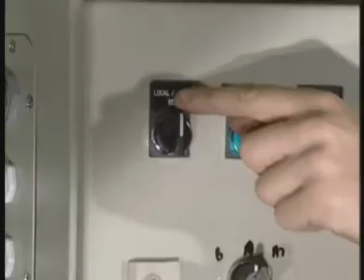Check that the pressure drop indicator for the pressure filter is green. Also check that the hands on the pressure drop gauges for both suction filters are in the green area. Check that the oil pressure is between 40 and 50 bar.

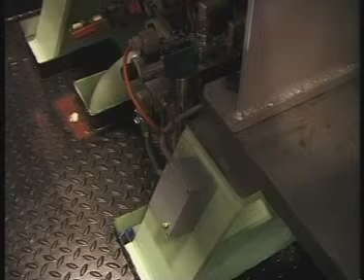Press the pre-lubrication button on the operating panel and check each of the feedback indicators to confirm that all lubricators are functioning properly. Set both pumps to remote control. The lubricating system is now ready for operation.

When the auxiliary blowers are started up, the lubricating system will automatically start and carry out the pre-lubrication process. If the engine is not started up within a certain period of time, the lubricating system will return to the standby mode and then start automatically when the engine is started.

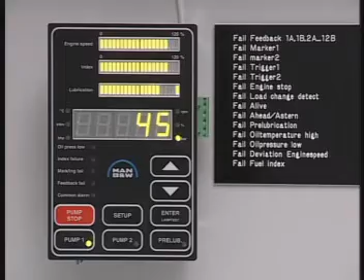Check that one of the pumps starts automatically when the engine starts and that no alarms have been activated. Check that the pressure builds up to 40 to 50 bar and check each of the feedback indicators to confirm that all lubricators are functioning properly.

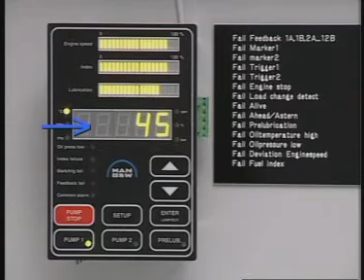Check that the oil temperature is between 40 and 60 degrees centigrade. Check that there are no leakages in the system. Check that the pressure is between 40 and 50 bar. Check each of the feedback indicators to confirm that all lubricators are functioning properly.

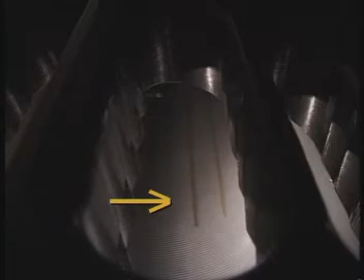Feel the lubricating pipe for pressure surges, the presence of which indicate that the lubricating points are being supplied with oil. Make regular checks, for instance in connection with the scavenge port inspections, that each lubricating point is functioning correctly. Start the lubricating system and press the pre-lubrication button to inject oil into the engine cylinders. Use a mirror inserted through the scavenge port to check all lubricating points.

Regularly measure the cylinder oil consumption via the cylinder oil tank and use these measurements to calculate the cylinder oil feed rate. Once a good cylinder condition has been obtained, with well-running cylinder liners and piston rings, the good condition can in most cases be sustained by employing the basic setting to ensure the correct cylinder oil feed rate. The basic setting corresponds to the reading 100% on the operating panel.

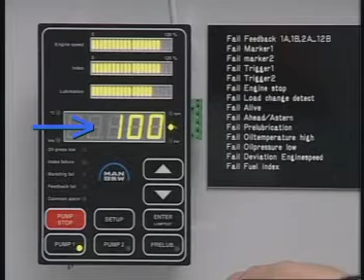When running in cylinder liners or piston rings, or in the event that abnormal cylinder conditions are detected during one of the regular scavenge port inspections, the feed rate of the relevant cylinders may have to be adjusted. See Instruction Book, Volume 1, Operation, Chapter 707. The feed rate of an individual cylinder can be adjusted via the operating panel.

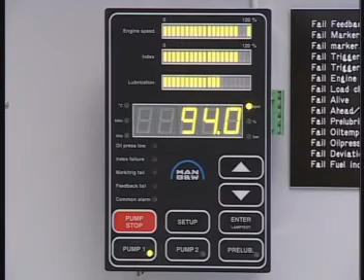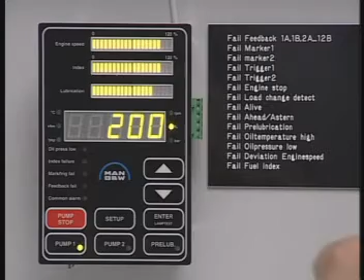Press Setup and Enter simultaneously to enter the setup mode. Press Setup to display the current feed rate setting. Press the up or down buttons to change the feed rate to the desired value. Press Enter to save the new value. Press Setup and then the up or down buttons to repeat this sequence for another cylinder, or press Enter to exit the setup mode.

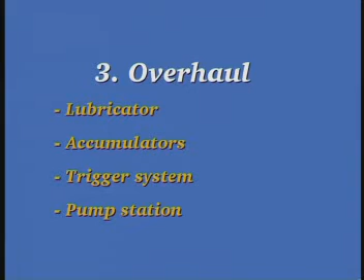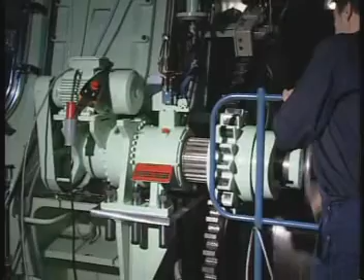Before starting any disassembling work, stop the engine. Shut off the starting air distributor. Block the main starting valve. Engage the turning gear. Open the indicator cocks and switch off the electrical power supply to the pump station.

Note, it is not necessary to stop the engine and pump station if the lubricator unit is fitted with 2 lubricators for each cylinder. See Instruction Book, Volume 2, Procedure 903. In the event that a lubricator malfunction activates the engine slowdown function, the lubricator can be replaced without stopping the engine, provided that lubrication is re-established within a maximum of 15 minutes.

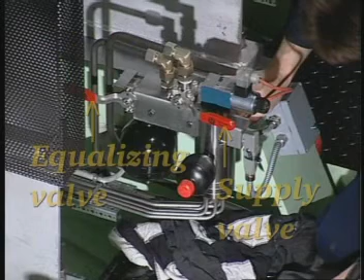Close the supply valve and then open the equalizing valve by turning both handles to a horizontal position. Loosen and remove the screws from the cover with lubricating pipes. Remove the screws that secure the lubricator to the hydraulic block. Disconnect the electrical plug and remove the lubricator.

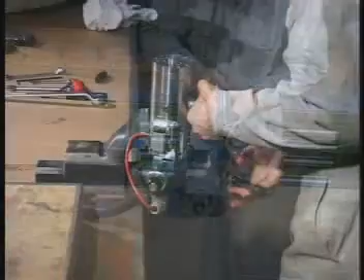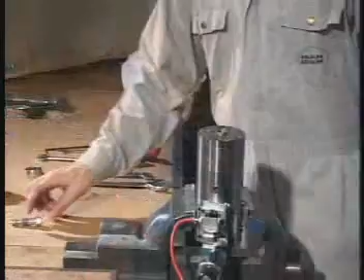Secure the lubricator in a bench vise with soft jaws. Unscrew the oil accumulator and the adjusting screw, and remove the bushing. Discard the O-ring from the adjusting screw.

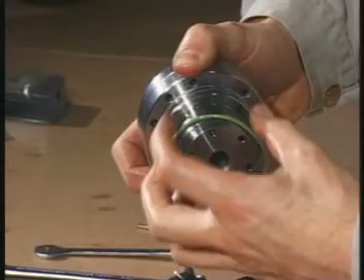Remove the screws that secure the cylinder block to the housing and remove the cylinder block. Discard the O-ring from the cylinder block. Remove the spring and the actuator piston and remove the plungers.

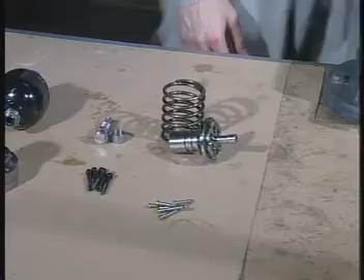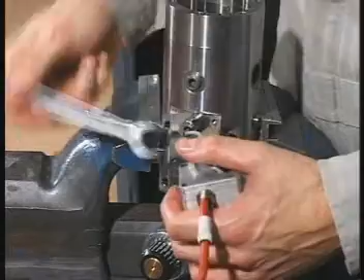Loosen and remove the connector on the solenoid valve and remove the terminal box. Carefully unscrew the feedback sensor. If the feedback sensor is to be replaced, disassemble the connector and disconnect the feedback sensor.

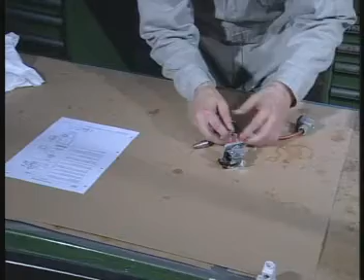Mount the new feedback sensor after fitting it with a new O-ring. Connect the wires as shown in the instruction book and then reassemble the connector.

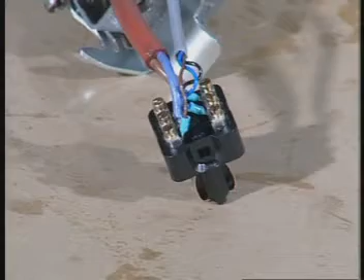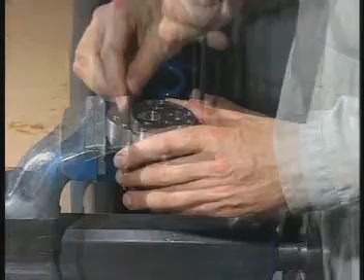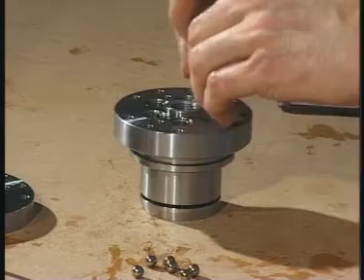Place the cylinder block in a bench vise with soft jaws and remove the non-return valve cover. Remove the springs and the steel balls. Remove and discard the O-rings. Carefully clean all the parts and dry them with clean, non-fluffy rags.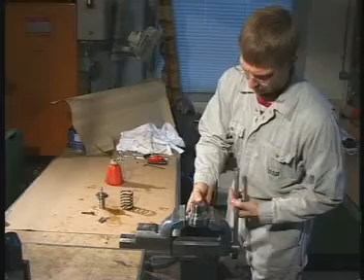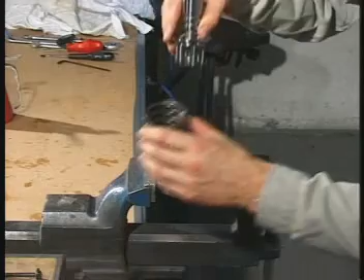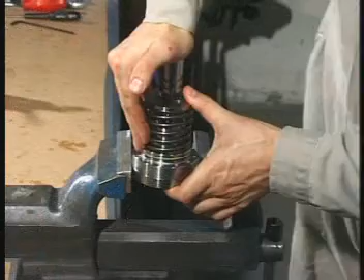Mount the plungers in the actuator piston and lubricate the plungers and cylinder block with cylinder oil. Insert and align the plungers in the cylinder block. Remove the actuator piston assembly, mount the spring and reinsert the assembly. Check that the plungers can move freely. Press the actuator piston downwards and insert the screw to keep the parts together.

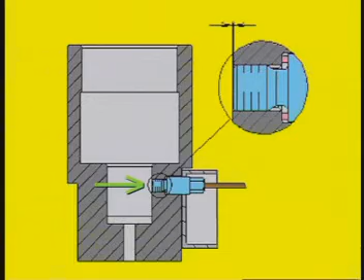Place the lubricator housing in a soft-jawed vise and mount the feedback sensor provided with a new O-ring. Check that the end of the sensor does not protrude into the cylinder for the actuator piston. Use fingers and something with a firm, straight edge, for example a caliper, to carry out this check. Mount the terminal box and the solenoid valve connector.

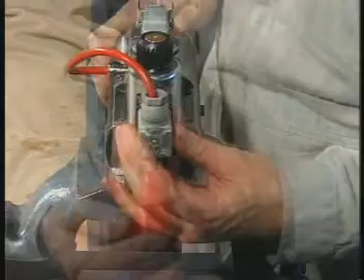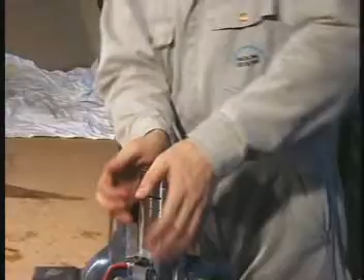Lubricate the housing and mount the cylinder block assembly. Remove the screw from the cylinder block assembly. Mount a new O-ring on the adjusting screw and mount the bushing and adjusting screw.

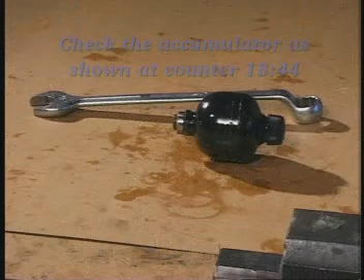Check the condition of the gasket before mounting the accumulator. Finally, mount the oil accumulator. If the lubricator is not to be installed immediately, use plastic plugs to protect each opening and coat all surfaces with a thin layer of oil.

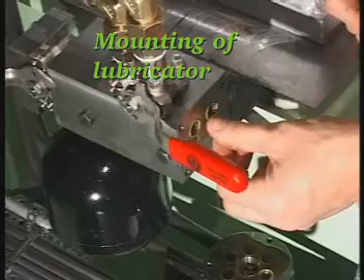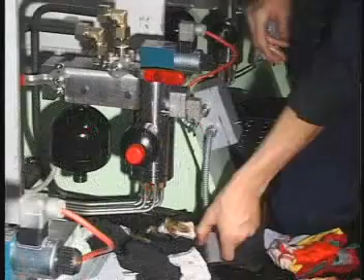Mount new O-rings on the hydraulic block and on the cover with lubricating pipes. Carefully mount the lubricator and secure it to the hydraulic block with the 4 screws. Connect the electrical plug and mount the screws which secure the cover with lubricating pipes to the lubricator.

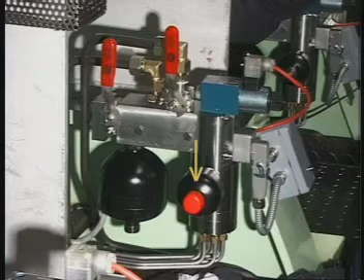Finally, close the equalizing valve and then open the supply valve by returning both handles to the vertical position. The smaller outlet accumulator must be dismounted before the pressure test is carried out. If there is room, the larger inlet accumulator can be tested while mounted.

Note: it is not necessary to stop the engine and pump station to check the inlet accumulator if the accumulator is equipped with a cut-off valve and a minimess drain connection. See Instruction Book Volume 2, Procedure 903. Close the supply valve and then open the equalizing valve by turning both handles to a horizontal position. Loosen the oil accumulators and unscrew them slowly to release any remaining oil pressure.

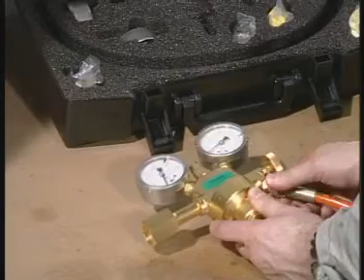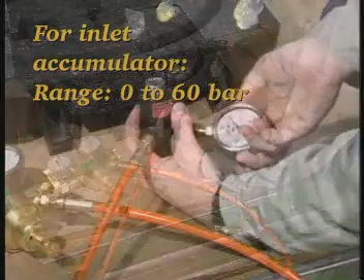Connect the hose to the reducing valve and to the filling valve. Insert a copper gasket and mount the 0 to 60 bar pressure gauge. Connect the reducing valve to the nitrogen cylinder and tighten all connections.

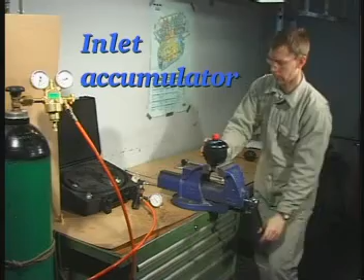Secure the inlet accumulator in a bench vise with soft jaws and remove the plastic plug. Carefully clean the sealing surfaces of the accumulator and the filling valve and mount the filling valve.

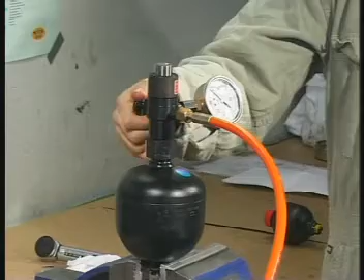Make sure that both the venting valve and the outlet valve are closed, and then open the plug screw in the accumulator with a 1/2-inch square socket wrench. Read the nitrogen pressure and compare it to the value stated in Procedure 903.

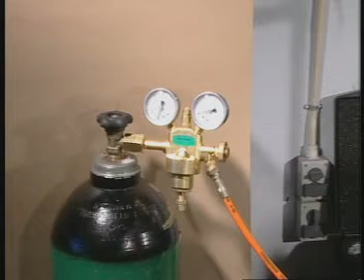If the pressure is too high, reduce the pressure by opening the venting valve. If the pressure is too low, make sure that the reducing valve spindle is turned fully counterclockwise and then open the valve on the nitrogen cylinder. Turn the spindle slowly in the clockwise direction until the outlet pressure is slightly above the specified pressure.

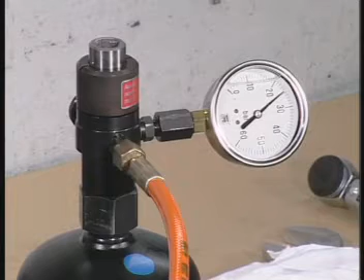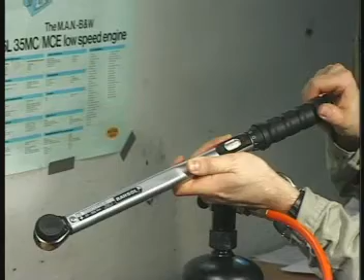Open the outlet valve, fill the accumulator to the specified pressure, and then close the outlet valve. Adjust the torque spanner to the value stated in Procedure 903 and tighten the plug screw.

Open the venting valve, close the valve on the nitrogen cylinder, then open the outlet valve and turn the spindle fully counterclockwise. Remove the filling valve and once again tighten the plug screw to the specified torque. Finally, mount the plastic plug.

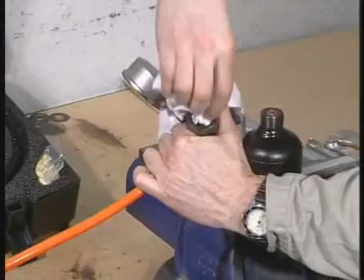Secure the outlet accumulator in a soft-jawed vise and remove the plastic plug. Carefully clean the sealing surfaces of the accumulator and the filling valve and mount the filling valve. Remove the 0 to 60 bar pressure gauge. Fit a copper gasket and mount the 0 to 10 bar pressure gauge.

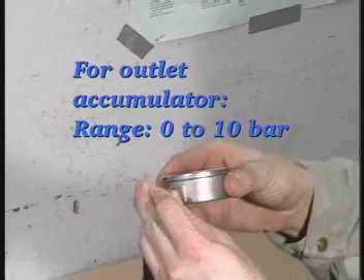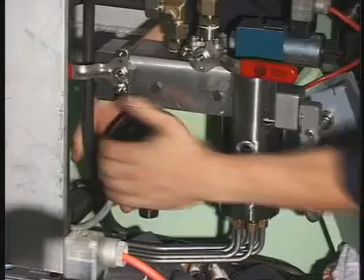Repeat the pressure testing procedure. Refer to Procedure 903 for the specified nitrogen pressure. Check the condition of the gaskets before mounting the accumulators. Mount the accumulators. Finally, close the equalizing valve and then open the supply valve by returning both handles to the vertical position.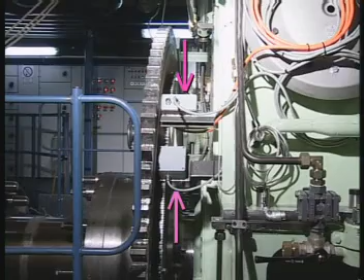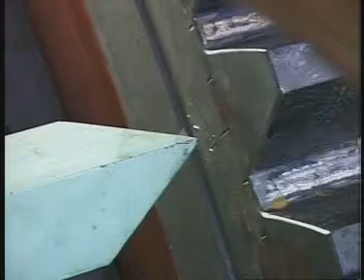The position of the crankshaft has no relevance with regard to the checking and replacing of the trigger pickups. However, before checking and replacing marker pickups, the crank throw for cylinder number 1 must be turned to the top dead center position. Check the top dead center position at the turning wheel and confirm it by means of a pin gauge measurement in the crankcase.

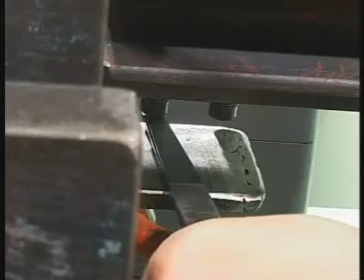Check that the uppermost edge of the marker plate is in the center line of the marker pickups. Check the distance between the pickups and their counterparts with a feeler gauge. See Instruction Book Volume 2, Procedure 905. Adjust if necessary. Remove the junction box cover.

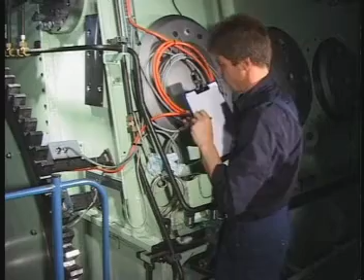Before replacing the pickups, make a sketch of the wiring connections, indicating which wire is connected to which positions, so that the safe remounting of the pickups can be ensured. Loosen the nuts, lock nuts and wires, and replace the pickups.

After installing the new pickups, check that the uppermost edge of the marker plate is in the center line of the pickups, and check that the gaps to their counterparts correspond to the values given in the instruction books. Finally, reinstall the junction box cover.

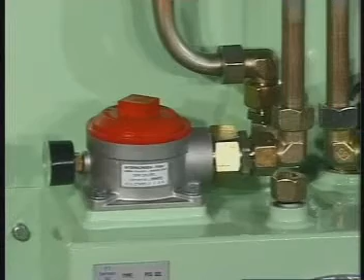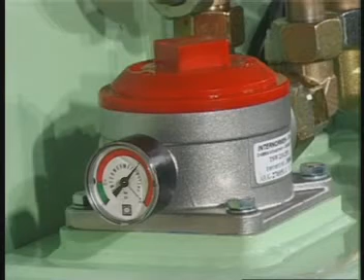If the hand of the pressure drop gauge points to the red area, the suction filter must be overhauled. This can be carried out while the pump station is running. Stop the pertaining supply pump and switch off the electrical power supply. Close the valve in the suction line and dismount the suction filter cover. The suction filter housing has a built-in cut-off valve which automatically stops the oil flow to the housing during disassembly.

Remove the filter insert and fit a new one. Mount the cover. Open the valve in the suction line. Finally, switch on the electrical power supply and set the pump to remote control. Check that there are no leakages.

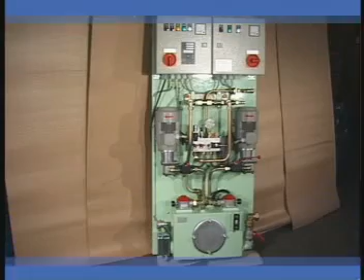If the pressure drop indicator is red, the pressure filter must be overhauled. This can be carried out while the pump station is running. Turn the handle of the valve so that the oil bypasses the filter. Dismount the filter housing and replace the filter insert with a new one.

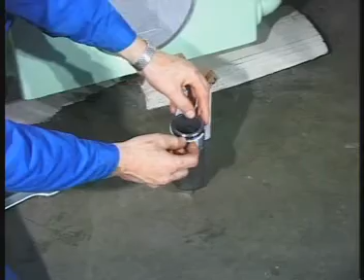Mount a new sealing ring on the filter housing and mount the housing. Reset the pressure drop indicator, if this has not already been done automatically, and turn the handle of the valve so that the oil passes through the filter. Check that there are no leakages.

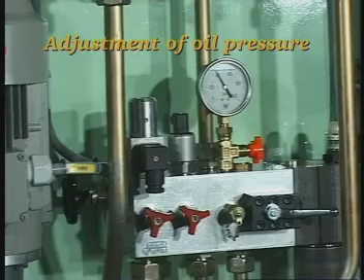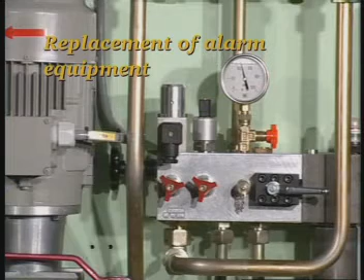Read the oil pressure on the pressure gauge and compare the reading with the value given in the instruction manual. If necessary, adjust the pressure by turning the handle on the side of the hydraulic block. The hydraulic block is fitted with a number of cut-off valves, which allow the pertaining components to be replaced while the pump station is running.